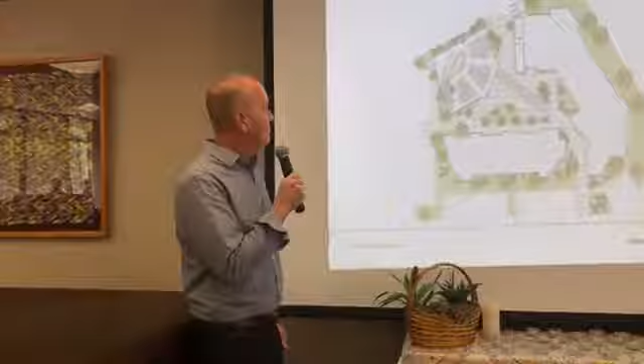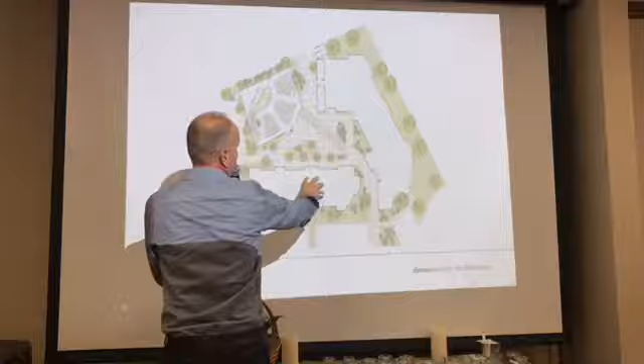So right now we are in the fellowship hall, right here. This is the main entrance into the campus, the rental area, and the corner building that we're looking to launch. It was really quite a simple site plan, understanding where a new building should go, but the geometries are a little unique because things aren't exactly square to each other, and we tried to be as efficient with the building as we could.

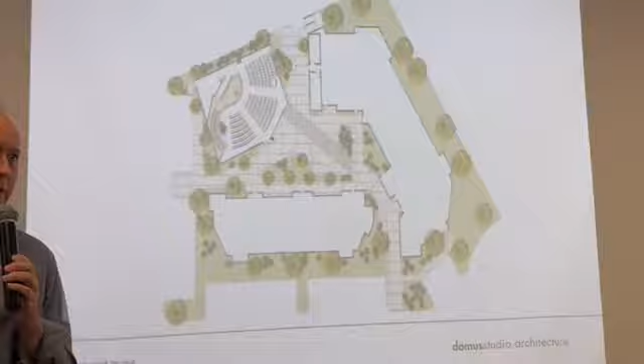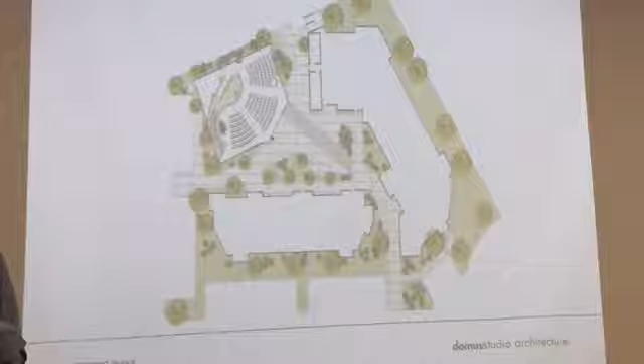Part of doing church work and a lot of the other work we do, we're always considering budget and how to get the most for the dollars. We understand funds are hard to come by, it all comes out of the collection plate, so we try to do the best we can with the least amount of space and make it as nice as we can with what we have. So what we did is look at a very simple building, almost a box with a corner, that came out of the task force recommendations.

But we put it parallel to the back parking lot, which actually set up some really nice entrances into the campus. They're almost funnel-like from the parking lot and from the north parking lot by the handicap stalls. So it really opens up the doorway, or the gateway, into the campus, along with the main walkway from the south side.

One thing we try to do is really try to be open and transparent with the building, breaking down the walls, breaking down the barriers. When new visitors come, usually at churches they'll say you're full when you're about 80% of the chairs, and people start going away. So it's really important that you have that breathing space.

But getting somebody to come in the door as a new visitor is usually a challenge because they're usually high anxiety. Should I go? Should I not go? Oftentimes you get to a courtyard like this and you're unsure which door you're supposed to go into.

There's nice people greeting you usually, and that helps. But it should be very clear as to where you go without having to rely on signs or having somebody telling you where to go. And you should be able to see what lies beyond, what lies ahead, so you're not walking through a solid door and all of a sudden you're on the chancel.

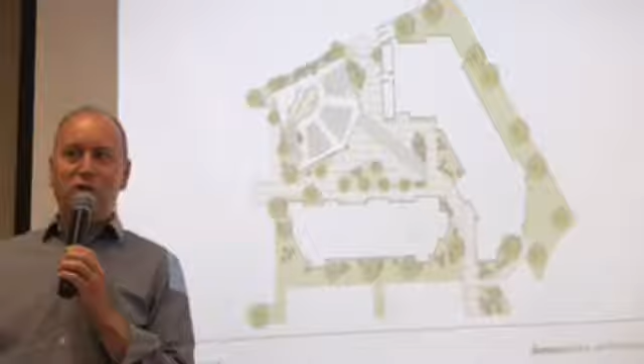I have a crazy story about that, about a church down in Poway. Churches are unique because they just add on as needed, as funds become available and as they grow, and oftentimes the circulation gets really convoluted. We went to this one church, parked in the parking lot, went what we thought was the front door, opened it up, and we were on the chancel, in front of the whole congregation. Very strange.

So we try to make it very clear where the door is. What we've done is from the main entry, we created a very strong walkway. The shade structure currently sits right there, but we've removed that and tried to create a gathering space in the courtyard. So from whichever way you arrive from the parking lot, you arrive to the main courtyard.

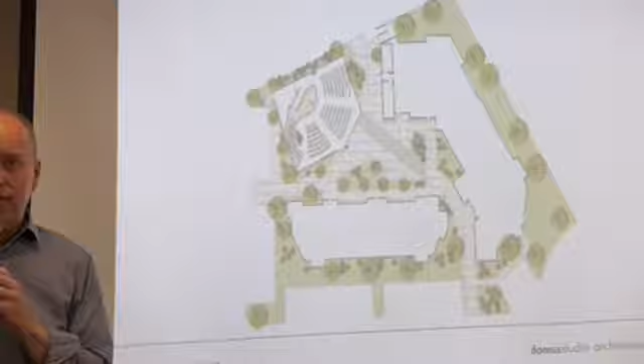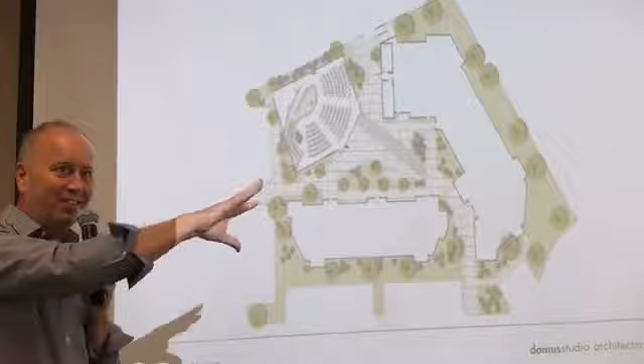So there's that place for a central gathering place, which you're blessed with already, but we're trying to encourage that interaction, a chance encounter, just stopping to say hi to somebody. That's a little bit of a challenge with the three entrances you have. Usually we try to get one or two entrances so people don't scatter, but it is what it is, and you have parking all around you, which isn't necessarily bad because you still end up with a central courtyard.

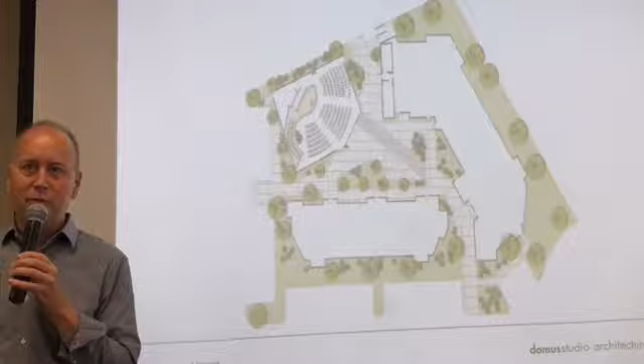So we looked at a sanctuary that seats 200. The back of the sanctuary has a bifold door, you'll see that in some renderings, so it really is a transformable space. It can open up to the outside, you can have it totally open to your courtyard, so there's really no door even to walk through when visitors come, they're just open and you're into the community. At the corners of the building there are windows on each corner, so somebody parking in the lot can already see into where they're supposed to go, the main worship space, the sanctuary.

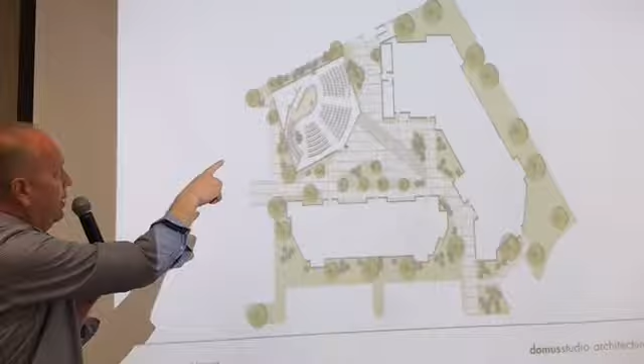So there are some side doors, for inclement weather, when the bifold doors could stay closed. You're blessed, and we kind of built on the bathrooms, the restrooms you already did. We're just going to utilize those for the new sanctuary, so we're trying to stay as simple as possible in order not to do all that. So we're really building a big open space with one storage room, a chancel, and a platform.

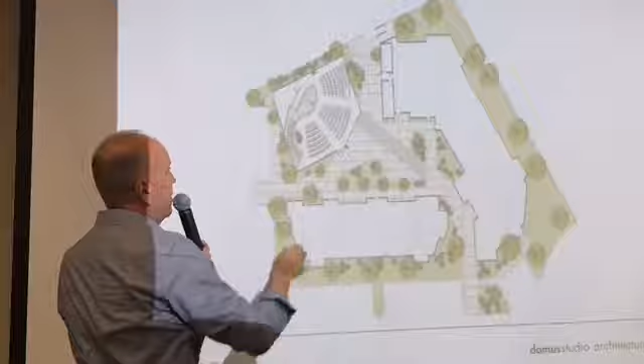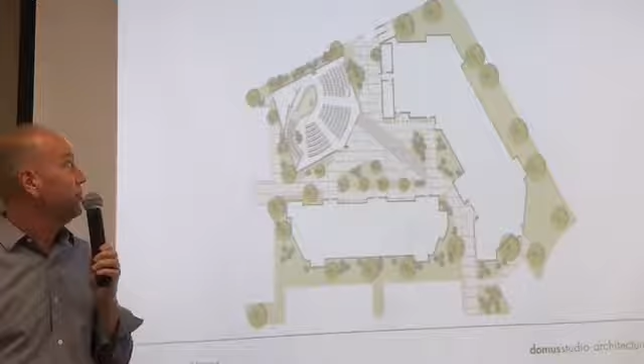So there's 200 seats kind of in the round, so it's a little bit better sense of community than we even have here. So you can look across the room and see other people that are with you. And then we have a raised platform, up about 12 inches, which is high enough for the rows that we have. And then we have about a 25 member choir that can grow and shrink based on flexibility, with a piano sitting on the floor in front of that.

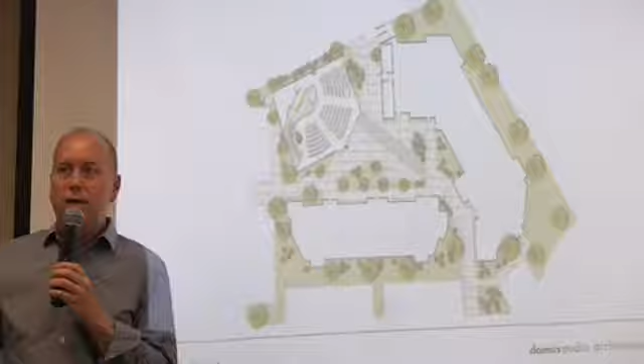So these are all chairs, new chairs will be put into the new space. So it is really a flexible, multi-purpose space. You can add, you can subtract, you could remove them all, you could have dinners there if you wanted, different types of events. So it really is quite a flexible space.

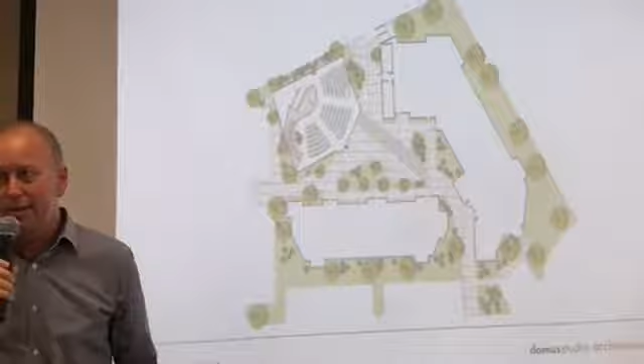The platform's quite large, much larger than that. And then there's a handicap ramp on the backside that allows access to the platform. And then a storage area in the back with a door on the backside.

David, we have a number of people watching live, and one question came through: is there handicap seating designed in, up front? Yeah, per code, this is not pews, so it's chairs, so that's much easier. When we go in for the code, we just designate handicap locations where chairs can seat, but since it's chairs, they really can put them anywhere. I'm taking that space we see toward the back, that's not handicap seating. Correct, this right here is a sound booth. Okay, that's the clarification I think they needed.

But it is a flat floor, there's no slope to the floor, so handicap accessible seating can be wherever you wish it to be. And we've shown 200 chairs, you may have fewer than that to start with.

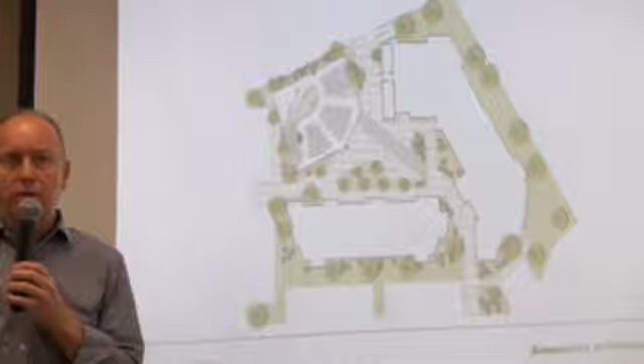So restrooms, again, just outside the door. And you can faintly see it, but there's a covered walkway that connects this building to the new building. So in inclement weather, you're under cover, but you also get a lot of shade, and you'll see that in the renderings.

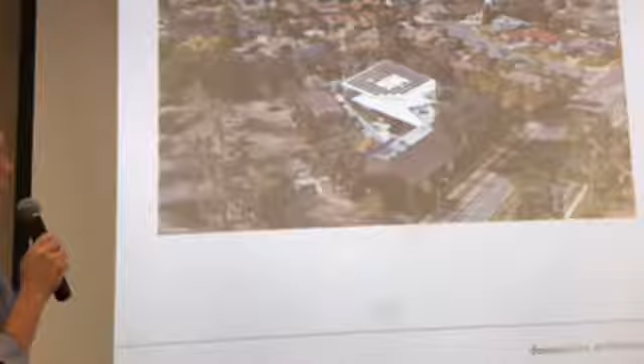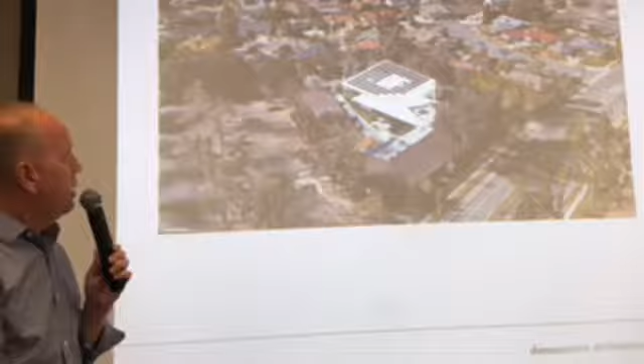This is an overview, just an aerial shot. So you can see the covering shade structure that connects the existing building to the new building, and then a very simple building. We're showing right now photovoltaic cells on the roof that can come now or it can come later as funds become available.

We're having a difficult time hearing you back here. Okay, I'll try to talk closer.

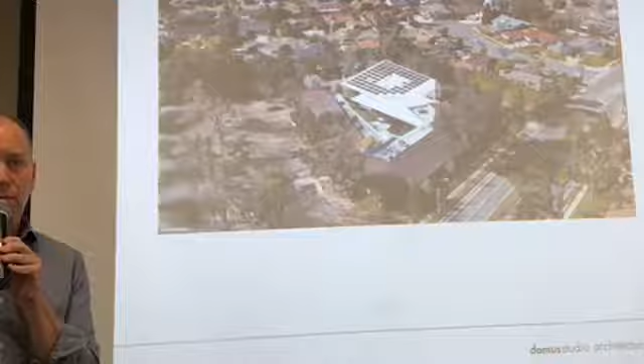So we're showing photovoltaic cells on the roof. Whether you do that now or later, that can come at any time. We usually just prep the roof for the power, auxiliary power, when we build. Did you say that was solar on the roof? Yes, yes, photovoltaic cells, solar panels for electric.

Now, did I hear you say that seats 200 people? Correct. And there's no balcony or second story? 200 is the maximum that it's gonna hold? It's flexible, what we call white space, so you could cram more people in.

The back of the space also opens up with a bifold door, you'll see that in some renderings. So the seating could expand to the exterior, which is still under cover. So it's a little less than double of what's here? Correct, correct. The task force had talked about if you're blessed and you grow to that number, you would just have 2 services.

It comes down to budget. We talked about this at the task force. There's size, there's quality, and there's money. So you can only change, if one thing is capped, you can only change the other two. So we were trying to keep the budget at a certain number, and so it's down to size and down to quality of the space. In addition to that, we're looking at keeping it very, very simple, trying to keep the dollar amount down.

This is a view from the parking lot, and on this side, it's just an aerial view. You've never experienced this way, but it just helps you visualize the wider opening kind of funnel into the campus, and then you see the photovoltaic cells again on the roof. So that does remove all the trees that are along that back corner.

There's a planter, I think, on the corner right here. There's some tall trees back there. Yeah, this is all remaining here.

I don't know if we're removing any tall trees, because the other building's pretty tight to that planter, to the wall already, but maybe I'm wrong. In a separate project, we're looking at the health of all those existing trees, and it's very questionable as to whether they're going to survive at all.

The good thing about the site plan is you have very little to deal with, because we're removing a building and putting a building back in the same place where it was at. So from a civil engineering and stormwater standpoint, which are really expensive issues these days, you're gonna have very little to deal with, which is also a really good thing about the project.

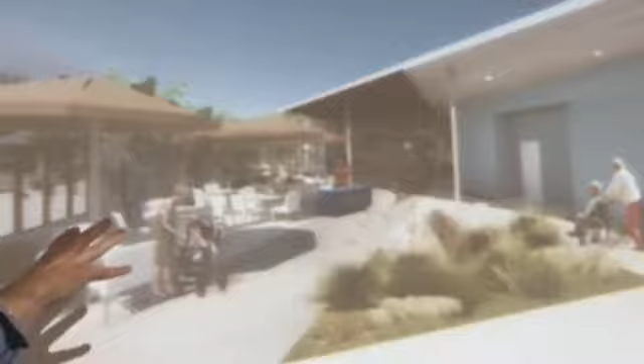So this is a view entering from the corner, looking towards the new entry of the sanctuary. You can see the reworked courtyard a little bit, with softer, more natural boulders — you'll see that in some of the other slides too. And a covered patio connects the new building to this existing building, really tying the two together and allowing for a shade structure.

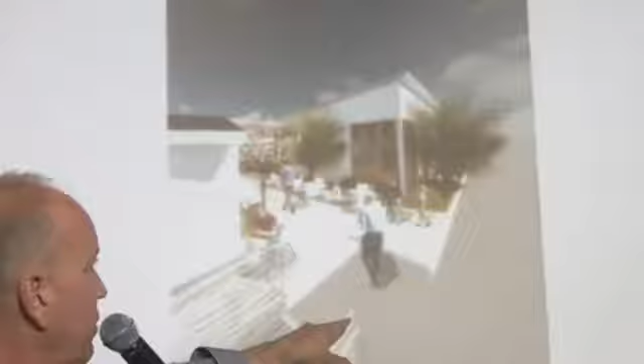This is another glimpse from the back parking lot. If you were to park on this side, this is your existing ramp and existing stairs that you just put in. Again, you can see the building opens up that gateway a little more, allowing you to funnel in, and you can see the windows on the corner, as on the other one, letting you see into the new space and kind of see where you're going. We would also be planting more trees there.

This is a view looking at the new entry, more across from the courtyard, looking at the building. You can start to see the big opening of the bifold doors that really transform the interior space into the exterior space — we took away the door basically. On most days, with the operable windows open on the sanctuary, you should be able to have the windows and doors open and a nice breeze blowing through. If not, we'll have AC, of course.

So you can see it's a very transparent, open sanctuary. We talked about this with the task force, having shades that come down but still let light through, and also a blackout shade — a double roller system. So you can have different types of events in the space, and you could black it out if you wanted to during the day.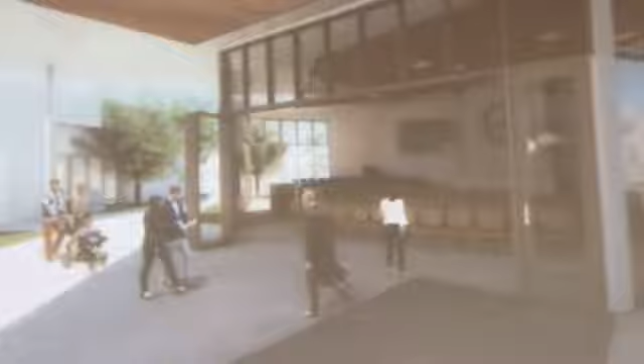That gives you the best view, coming in on the pathway, of what you would see. You see the bifold doors open, secondary entrances into the sanctuary, and a clerestory up on top. We added some wood ceiling under the entry canopy to warm it up a little bit, and on the inside there's a kind of chipboard surround with a floating wood ceiling and exposed structure above, plus some skylights up there too. You can really see where you're going.

This is a view at the big bifold doors, looking into the space. Both corners are opened up, with a straight focal point of the chalice, and we're looking at one large monitor — either a projector or probably one large monitor on the wall, as large as we can get, which should work well for the size of the room. You can see the seating in the round and the choir area, so there are great sight lines to everything. The short wall in front has a ramp behind it, a Joys and Sorrows area, and some sort of furniture piece off to the side on the ground level where that can occur.

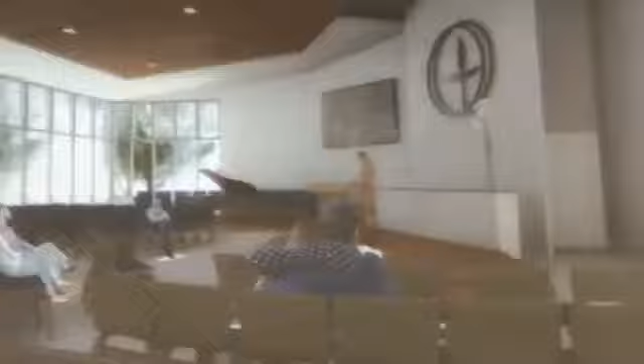Next, this is a side view, kind of the most extreme view toward the television and the platform itself. Again, you can see a lot of the windows, and it's a very indoor-outdoor space.

Another view from the other side, almost from the choir, looking back toward the church — you can see how the indoor-outdoor space works with the bifold doors. There's a screen up there, and also one on the left; that screen is a little hard to understand because of the perspective, but it's a confidence monitor that's also a screen for the choir. So you have two screens, so everybody, wherever you sit within the space, can follow the service.

So how much elevation do you get in the ceiling here? It's ramping it up, yeah — it's not much.

I think we're 16 feet up to like 22 feet, but we're sloping the roof for the photovoltaic cells. You don't notice because you're kind of buried by the other building, so there's not really an opportunity to see the building from a distance. It's more about what's the ideal slope for the photovoltaics, and it also helps on the inside as we build towards the platform height.

You want to make it feel as spacious as possible. Yes, absolutely, you can see it's a large volume, appropriate for the size.

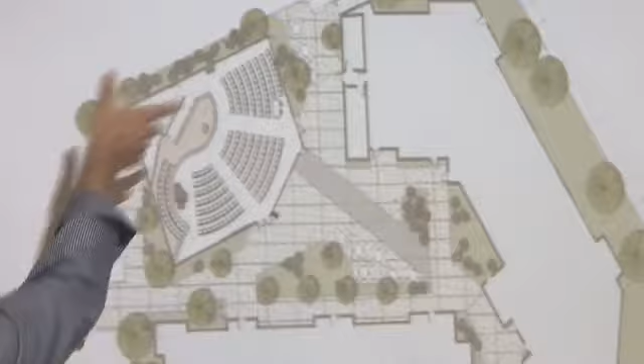I love the openness as well. I do have a question about the ventilation. I know in one area the doors completely open up, but do the other windows open up as well? Yes, you'll see those in the renderings, and we also have skylights that would let the heat out through natural convection.

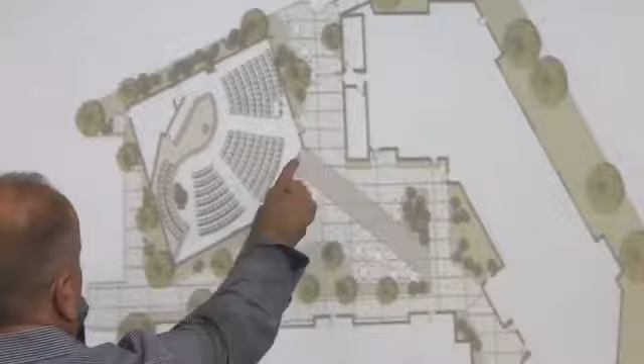On this view, where are those windows that fold apart? Right here, right in one area, right at the main courtyard. So that main seating bank could then extend to the exterior. It's at the same level. Yes, yes.

Everything is all open, it looks lovely. What happens when the ambulance drives by or the police car drives by? Is there some way to quiet them down, or buffer them, incorporated in the design? It's a challenge trying to do everything well, but we don't want that.

Craig and I actually attended a service down in Dana Point at the Gloria Dei Lutheran Church, and we noticed they have these folding doors. The minister hit one little button and it opened. I would think it's very easy—they look massive, but they're easy to close as well. So it's not something where somebody's pulling on the doors and making a lot of noise; they glide back and forth.

I just want to mention also, in case you didn't mention it, there is actually a ramp up onto the stage for everybody, which is great. Yeah, on the backside here. I did mention that, yes.

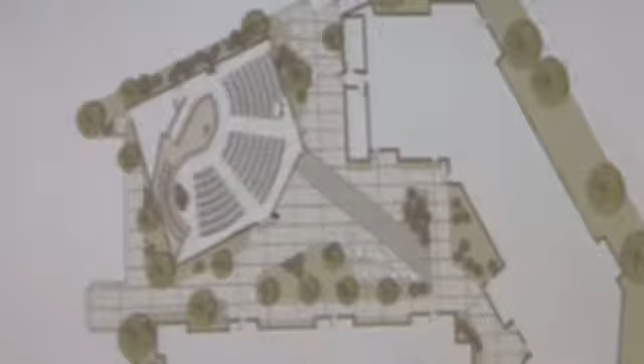Those things can be worked out, just let us know. Craig and I have done that on a number of occasions with our church back on Nantucket. Also, if you're 70 and a half and have to take a minimum distribution, you know if you don't do something with that money you're going to be penalized - you have to take it. So what better place to give it than the church? And you won't have any tax liabilities on that either.

A lot of us have alumni groups and we're asked many times to give, but we may go to those campuses once a year or once every 10 years. You're here every Sunday, and you know what a wonderful organization this is and all the good work we do. So priority-wise, Craig and I have chosen this as our priority. There are other places that have asked us for gifts, and we've said, not right now - give us 3 years, we're giving to our church to build a new sanctuary.

We're also looking at bucket lists - a lot of us have bucket lists of places to go. You might say, yeah that's great, but I'm going to hold off on that for 3 years until I help build this sanctuary. There are ways to look at it, but this is a valuable community to so many of us, and I think this is a way we can not only enjoy it ourselves, but also bring new people in and extend our liberal religious values to more of Orange County. That's all my rah-rah speech, no more.